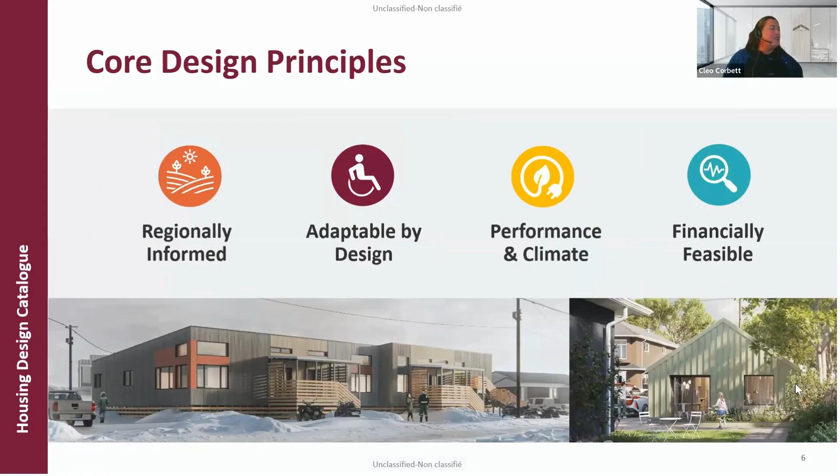So these core principles, first of all, the regionally informed. Turtle Island is a really big place with numerous different climate zones, adaptations of the national code, different lot sizes, and different approaches to zoning. So we looked at all of these things and worked with local designers who were experts in their region.

So they could respond to housing needs, variation in climate, and also regional form and character preferences - really interesting process. We also knew that accessibility was going to be an important priority for the catalog and for putting this next generation of homes across Canada. So we did work with Accessibility Standards Canada, and I am happy to say that 37 of the 50 designs have at least one unit that is accessible.

And there are options as well - accessible ready units that can be easily converted in the future, or enhanced accessible units. And as it says there, this responds to CSA standards as well as national code standards.

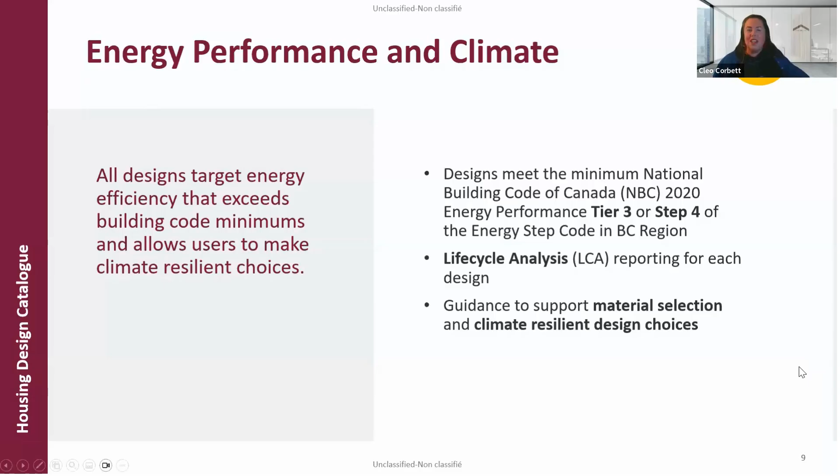Energy performance and climate, we all know that this is really important. So all of these designs exceed building code minimums, and as well, there are choices that people can make if they want to go above and beyond that. There is life cycle analysis provided so that you can understand embodied carbon in potential projects, as well as a materials guide and a climate resilience guide for users and for qualified professionals to help bring these to permit.

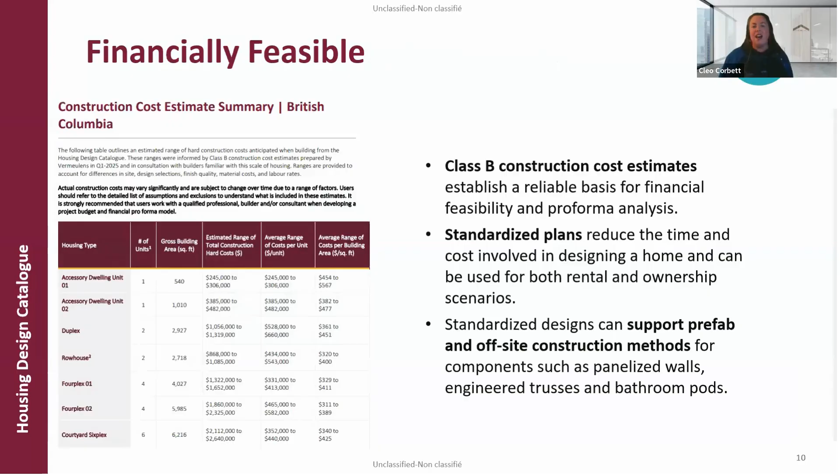So how does this work? We have provided technical drawings to be as near permit ready as we can without having a site. So we coin these as siteless designs. End users will need to work with a qualified professional to do anything related to the site, such as servicing details, access, site planning, to bring these plans to building permit submission. You can see there's a list of things that local government may require. But that being said, we worked with a lot of communities, local governments, to pre-review these designs to get them as close to permit ready as we could. I'll talk a little bit more about that in a sec.

But what's included in the catalog? Full technical packages, architectural and engineering, as well as all of the templates and guidance I talked about, resource guides, as well as regional site plan examples are coming out. That's more to support those homeowner developers. And then check out the website, there's a lot of different resources offered there.

I'm going to give a quick example to just bring these homes to life a little bit. Vancouver did a number of zoning changes in 2023, which enhanced a lot of their zoning for missing middle, multiplex, and small scale housing in a number of different neighborhoods. Vancouver was one of our communities that pre-reviewed the designs, and they are one of our local partners. And I work with them on a number of different things.

And they said, hey, we have this site, it's challenging for us, it's a sloped site. Usually when we develop housing, it's going to be higher density, but it just doesn't fit in this context with existing zoning. Do you want to work together and do a bit of a test case on the catalog homes? So this was a great opportunity, we co-funded this feasibility study.

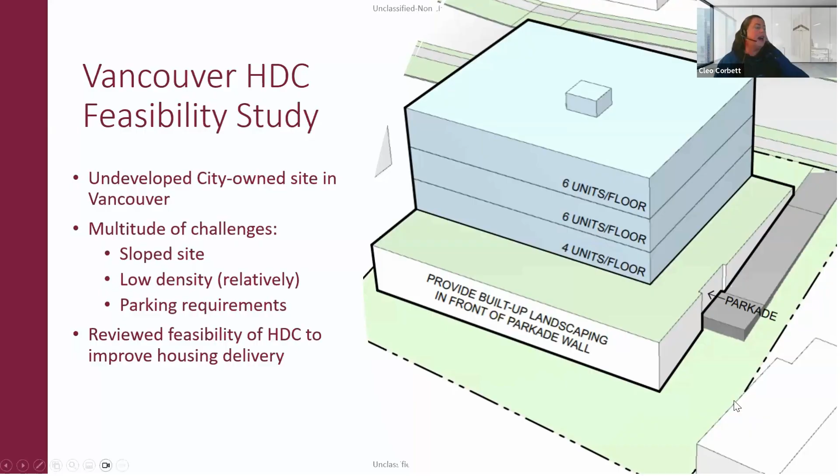So what you see here is kind of a custom standard build on the site that would look to maximize density under existing zoning. So there were 12 units that were 1-bedroom units and 4 units that were 2-bedroom units, so 16 units in total, but quite costly because you would have to build underground parking, that kind of thing. And the site is challenging, it's sloped.

So when you compare that with testing catalog homes, you can see here the number of different options that they used, they mixed and matched. I would encourage anybody who's interested to do that. I've seen people mixing duplexes with accessory dwelling units, or repeating the rows in a townhouse kind of configuration with 5 facing 5 as an example. But this example, the architects who did this work for us said, wow, it was great to have the catalog homes because it really jump-started the process of how we could look at what density and what opportunities could exist on this site.

So the option that kind of wins out is doing 3 fourplexes on the site. There would be surface parking, but that gives 12 units total, with a number of family size units. So although it's less density than that custom small apartment, the floor area is relatively similar. The costing is lower for the build. And also, I would say that, to Dan's point, it's that ground-oriented housing that people really enjoy living in.

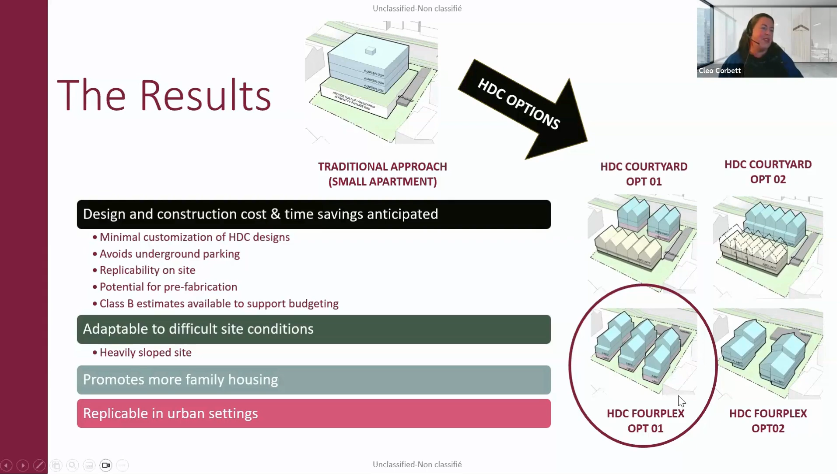Yeah, and so this is just a great example of where things are looking promising for the use of the catalog in this potential project. So we'll see where that goes. And I think that is it for my time. Thank you very much for the opportunity.

Thank you, Cleo. Well said. Thank you for showcasing the federal government's efforts to enable more housing across the country. I think that's the proper mindset we all need to have. And I think I'm old enough to remember what a momentous occasion it was back in 2017 when the federal government launched the first ever national housing strategy. So this is really good progress.

Alrighty, next up we have Kevin. Your turn to showcase the provincial housing designs catalog. Great. Thanks so much, Raymond. And I'm going to start by just echoing something that Cleo ended with. Of course, I've suddenly just lost my actual visibility on where everyone goes. So I'm just going to trust that you can see me. Raymond, can you see my screen just fine? I can, yes. Okay, hooray.

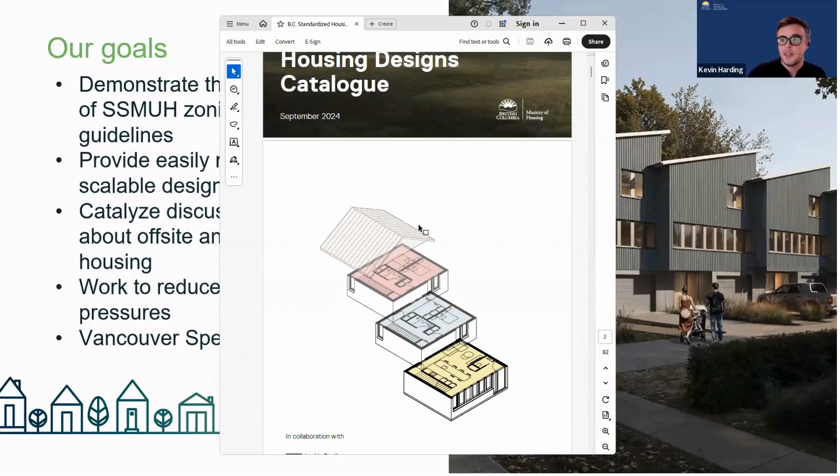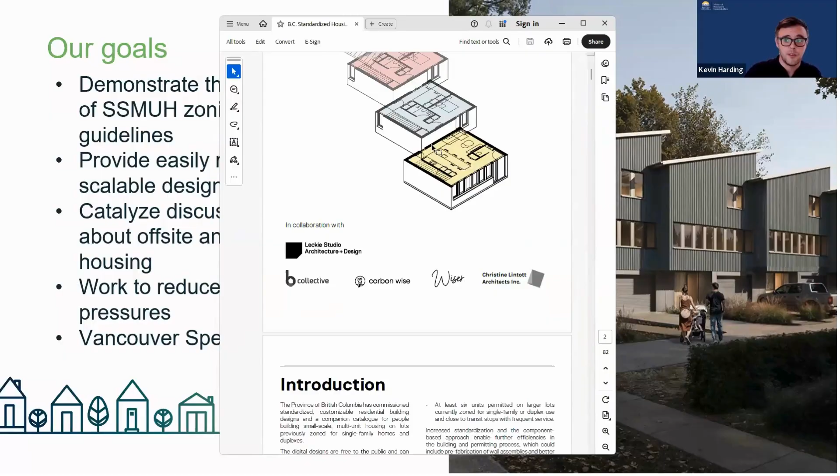I'm just going to drag the PDF catalog onto the screen so you can see here the standardized designs that the province of BC procured. They're a little bit different — they're a building blocks approach. If you page through this catalog, or even download the Revit files available through the province's website, you'll see they're broken out into different floor plans and building blocks for different types of dwelling units and homes that can be assembled in different ways.

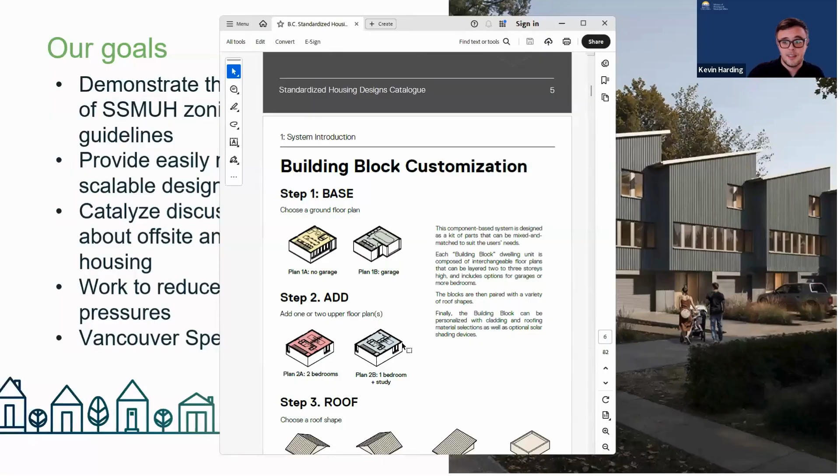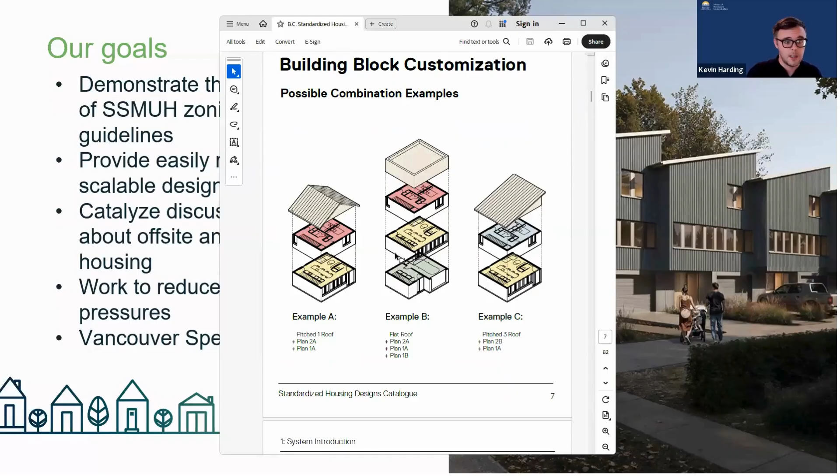This adds a little bit of complexity compared to the CMHC designs. The anticipation here is that a qualified professional, like a designer — not necessarily an architect — can pick up these designs, configure them for what a homeowner, landowner, or small- to medium-scale developer is looking for, into designs that can be submitted to local governments for permitting.

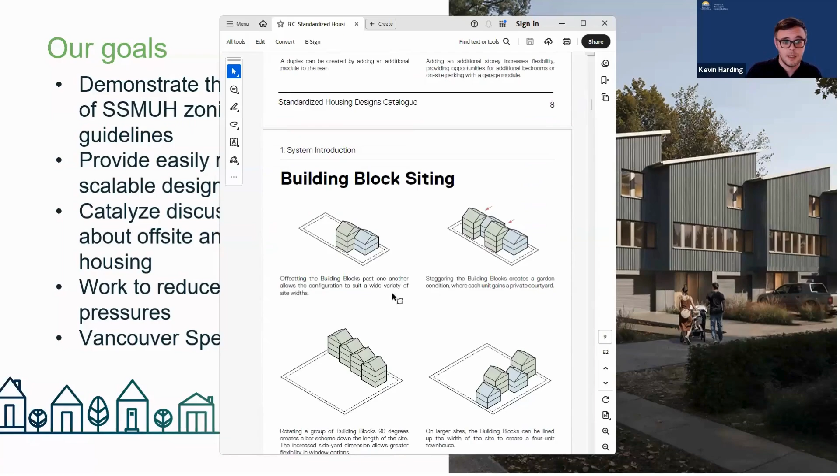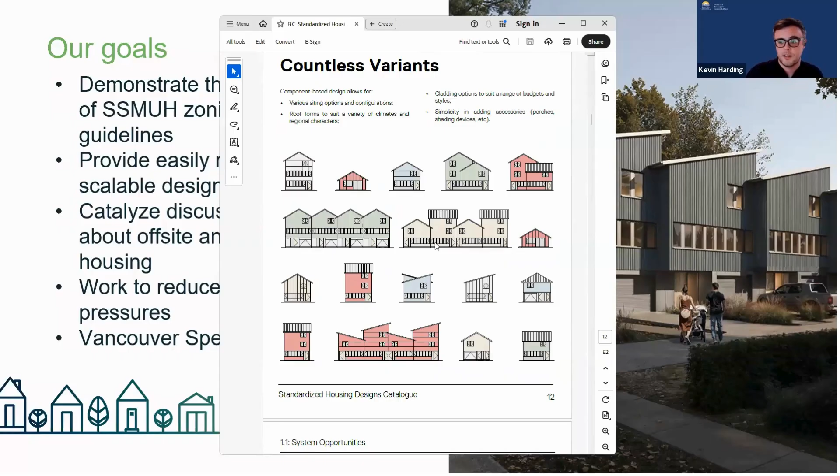The designs themselves have multiple facings, sizes, and orientations, so you can do duplexes, multiplexes, and multiple site comparisons. They include in the catalog and data an opportunity for really countless variants. As a side note, it was fun — we asked to procure 10 standardized designs, and we had to go back and forth with the architects who did this work to actually build out 10 discrete designs, because they told us the building blocks approach could give an unlimited amount of variations.

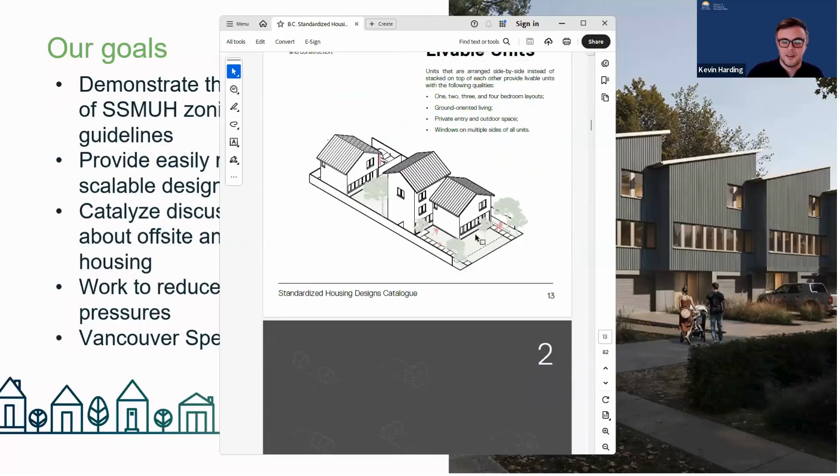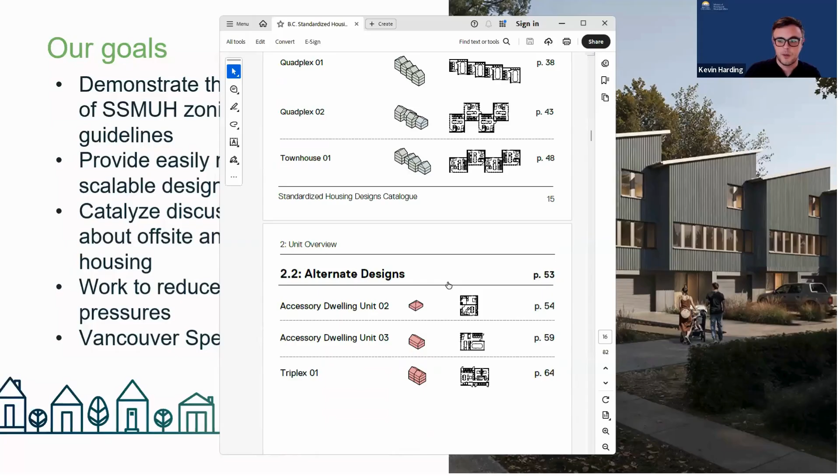The catalog includes information around a Class D costing analysis. The designs comply to step 4 of the energy step code. They assume a climate zone somewhere around the middle of the province, so it's not disposed towards the lower mainland or the far north, but has a range of applicability.

I note, though, that the designs don't include the fixation to the ground or the foundation, so there is some work that needs to be done. We know that adds a little bit of complication, and we're working to see what we can do about supporting implementation in various places. But our goal really was to catalyze some of these discussions and provide examples of standardized designs that could be rapidly implemented.

And like Cleo has highlighted, we've heard from local governments and builders that there are existing standardized designs that work in some places that they've already got. Our key message really is, if there's existing design catalogs, if there's other catalogs, we've started this conversation and we're looking for ways to support it as they go. Other key assumptions, as I see come up in the chat, we assume sort of a 30-foot lot.

That doesn't work in all local governments, I know, we had to pick something in the middle. It was a bit of a fun adventure trying to figure out where we could go, because much like where we hear from some local governments that the building blocks are too wide to fit in their lots, we hear from others that lots are too wide to efficiently use the building blocks. It's a fun Goldilocks problem, but we're hoping to pre-start some of these conversations.

What I wanted to do, though, is after briefly introducing the catalog, reminding people that you can download that marketing brochure that gives an overview of the blocks and the alignment, compare it to CMHC's catalog. We think that the designs slot well in next to each other. We don't believe that there's any overlap. We don't think that there's duplication. We think that they're additive. They add to the range of selections that are available.

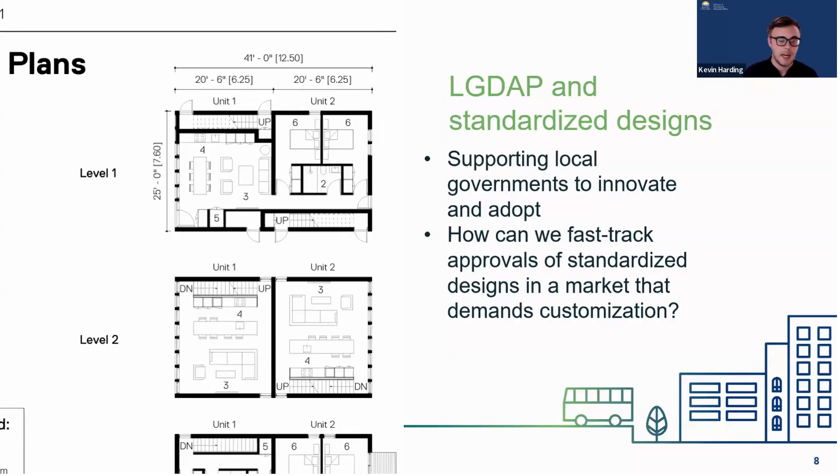We're supporting local governments in terms of innovation and adoption. Cleo's team has created that local partners process where they ask local governments to take a look at some of the designs, take a look at some of their land, highlight where they would work, maybe review one or two of the designs up front and be able to say with confidence we could expedite permitting. All of these things my team at the ministry are very excited about and happy to support, whether it's our catalog, CMHC's catalog, or another catalog.

And we're also trying to build out alongside our colleagues at the Building Permit Hub to identify how we can support a community of practice for people like the folks on this webinar, to share knowledge, share learnings, share experience in reviewing some of these applications up front to see how we can expedite approvals in some way or another.

And then from there, we're also looking at standardization in new ways as we go from here. Our colleagues at BC Housing are embarking on a really exciting project called Digitally Accelerated Standardized Housing, which takes some of the principles of a catalog of standardized designs and applies it to mixed or multi-unit residential buildings, but can also be applied to Part 9 buildings the same way, with standardized components and standardized blueprints that incorporate planning and servicing and land use bylaws to know where things go.

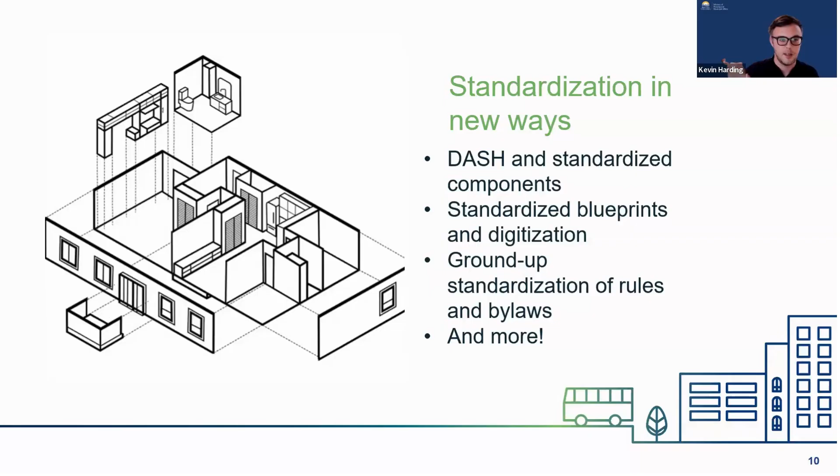And that's also helping support some ground-up standardization of bylaws and rules. This is exciting. We're continuing down this path in the same way that we're supporting uptake of the catalog for multiplexes where we can. Really, that's where I'm going to stop, because I think I've given you an overview.

Of what we procured, why we procured it, and what we hope to accomplish in terms of future work. And I'm thrilled and excited to hear from Bryn and then the questions, Raymond. So I'm going to pass it back to you.

All right, thank you, Kevin, for your presentation. I'm actually glad you mentioned the LGDAP program. I believe there's $9 million being made available for local governments. More details to come, but from what I've seen so far, especially from that news release, the Minister of State announced digitization, standardized designs, prefab, offsite construction, and funding available for local governments willing to pitch projects in relation to that. Reach out to me, I'd love to hear what you guys are thinking about.

Excellent. All right, so we're now going to shift into the practitioner's perspective and panel dialogue. I want to ask all the panelists to turn on your cameras.

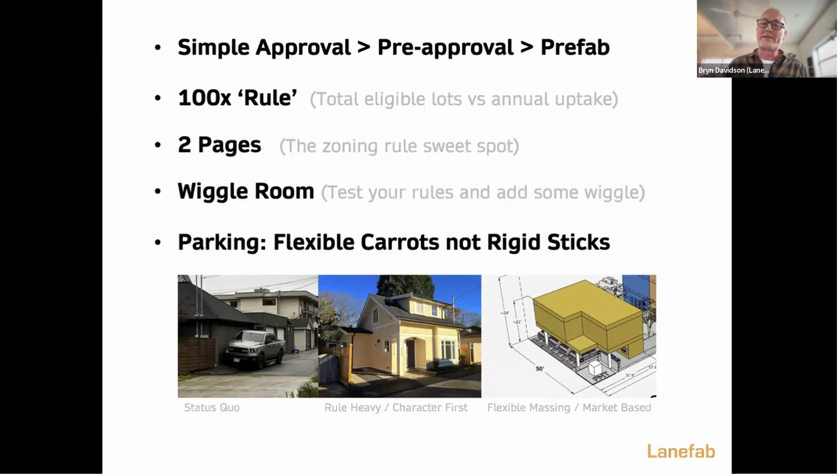So if I could get this approach across the whole province - count garages as FSR, don't count carports, allow building over the top - then we can start to scale these things up. These are the ways I think about how do we make this process scalable, because our business would not have been able to start if every laneway house had to have a development permit, or if it was only allowed in certain neighborhoods, or if it had to be micromanaged in terms of design aesthetic. We had a business because it was simple, relatively straightforward, and scalable. So that's what I'm hoping to see.

Thanks, Bryn. I'm glad you mentioned parking. Guy, if I recall correctly, maybe 2 webinars ago, we asked you to give a quick overview of Bill 25 that was at that time recently introduced. Just wondering whether you can provide a quick reminder to the audience about the parking provision within Bill 25. Give me 1 sec.

Well, I think basically, we know that Bill 44 came along and said you can't require parking for residential uses in transit-oriented areas, or maybe close to transit - I can't remember if I'm right about that. And then Bill 25 - wait, let me look at this real quick, I just have a note here I'm bringing up about parking. Oh yeah, right, so at least if my notes are not wrong, section 525 of the LGA now - no parking requirements for Bill 44 or SSMUH units within prescribed distances of bus stops.

And then also Cabinet can now make regulations regarding the exercise of the remaining - I call it the recently eviscerated - 525 authority, including making regulations about how you can exercise your parking authority for parking for small scale multi-unit housing that is not so close to transit. So: no parking close to transit, no parking in transit-oriented areas for residential uses.